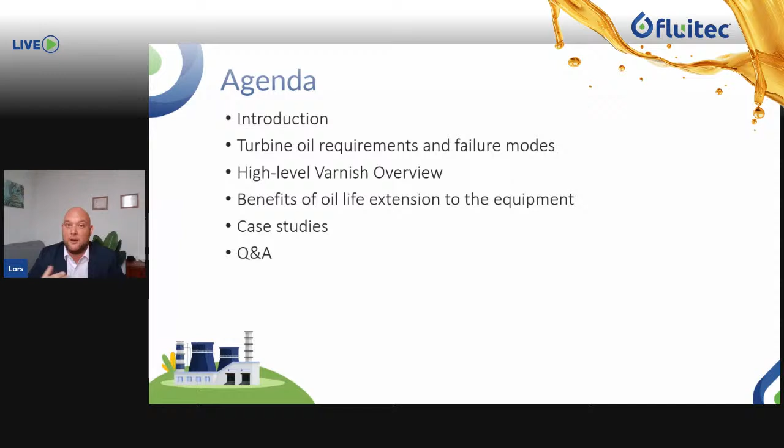So today I have the honor of speaking to the audience about advancing your machine to Fill4Life Systems. Important topic, as Sonia said, because we all operate advanced and expensive equipment. Of course, we want them to last as long as possible. So today I will talk to you about a few topics. The introduction is done very lovely by Sonia, so thanks for that. We'll talk a little bit about turbine oils. What are they supposed to do and how do they fail? It's a bit of a high level overview on things. And at the end, I want you to walk away with new ideas and new methods on how to make your equipment last as long as possible. And also, very important, how to make them run as efficiently as possible and how you can save some money, some time, but also save or at least help save the planet.

So, this is a strange combination. We say we are greening the lubricant industry. That may sound strange, but what's not very commonly known among the public is that lubricants play a vital role in reducing friction. And if you reduce friction, you increase the energy efficiency. So you reduce the energy usage, which means you reduce the CO2. So lubricants are actually a crucial part in sustainability. They are everywhere as well, they are unavoidable.

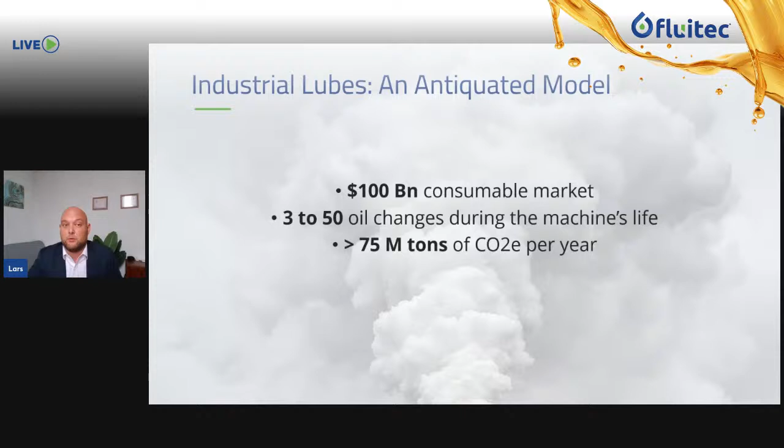So when we zoom in a little bit on industrial lubricants, we are faced with the fact that this is currently a very antiquated model. What this means is the industrial lubricant space is driven by consumables. It's all about pumping around this volume, getting the oil into equipment as many times as possible, changing the oil as many times as possible. That's the driving force behind this industry. It's one of the biggest markets in the world, and it's making a lot of money. But it's also producing a lot of CO2, and it's not a very efficient model at the moment.

So when we look at the life cycle assessment, that means the pollution of a lubricant throughout its life cycle, we actually can identify something very interesting. You see all these big refineries, big plants, oil exploration platforms, and so on. And we all know these are very polluting, right? But when we look at the total life cycle of a lubricant, this part, the cradle to gate, the production and logistics, shipping it around the world, is actually only 33% of the total pollution that a lubricant generates over its lifetime. The majority of the pollution is at the end of a lubricant's life. So why is that? That's because only 50% of lubricants that are used are recycled in today's world. The rest basically gets burnt up into the atmosphere.

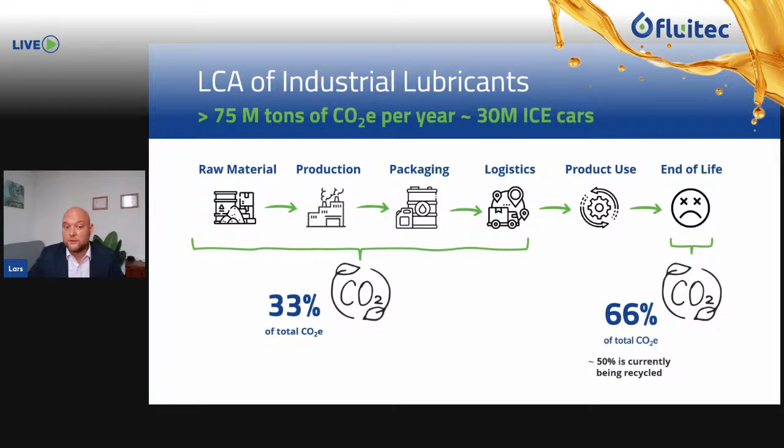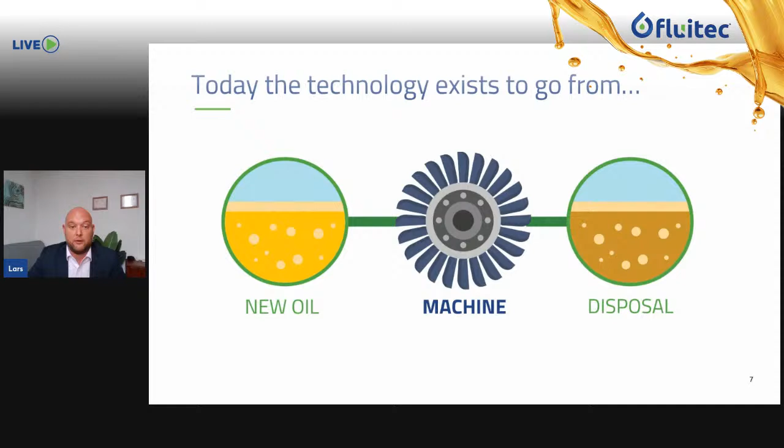With all the chemistry and molecules that are inside, you can imagine this generates a lot of pollution and a lot of CO2. And this is no longer necessary. At least we can reduce this quite a bit, because the technology exists today to go from the current model where we use up a lubricant and then dispose of it to a model that's much more efficient,

which we call the Fill4Life model. This consists of a cycle of activities that users and operators can do to get more out of their lubricants. That means extending the life of their lubes. That means lower operational cost, less risk, less maintenance, less time, higher profits, less pollution. The lubricants last longer, the end of life pollution goes down, and it's a win-win for everybody.

So there's a certain cycle of activities that the end user can do, which starts with being predictive instead of reactive. That's very important, meaning we want to do the right tests, we want to generate the right data on the fluids to make sure we have an accurate picture of their condition. We want to use everything at our disposal, both online and offline, relationships with OEMs, relationships with lubricant suppliers, to get all the information that we need to come up with a proper consultation for the customer.

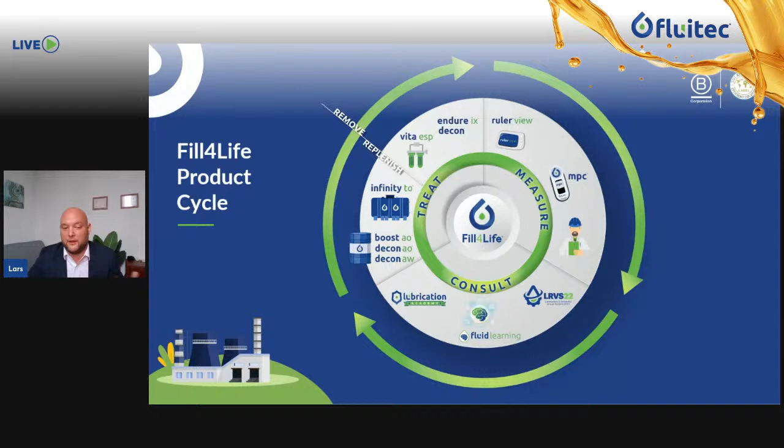And then at the end, we also want to treat, of course. And this is where it becomes interesting, and I'll go a little bit deeper into that later on in the presentation. But when we look at the product categories that we can provide, we can identify four main categories. And the one that I want to zoom in on a little bit more at the end of this presentation is the last one, which is life extension. This is, of course, important when we look at the end of life cycle. We can extend the life of the lubricant, which means we reduce the CO2 and reduce the environmental impact.

The product lines that we provide at the customer side range from different filtration methods to aftermarket additions to the oil, which contain additives or can enhance solubility of the oils, which I'll explain a little bit more. These product lines are always growing. A lot of R&D is being invested into them. They are innovative, new technologies to extend the life of lubricants, but also to optimize lubrication during its lifetime.

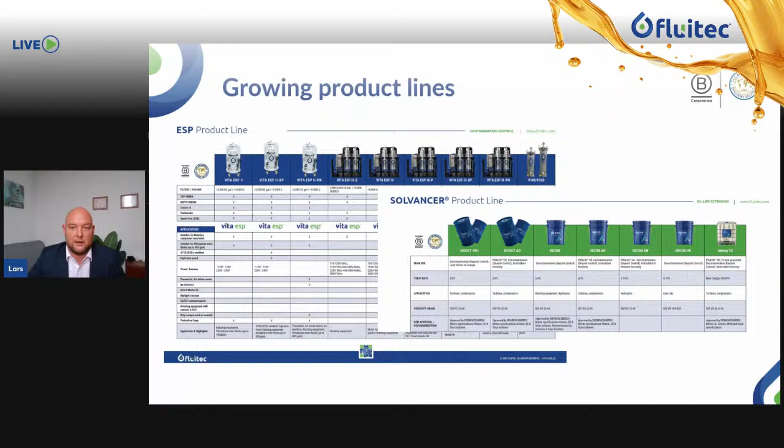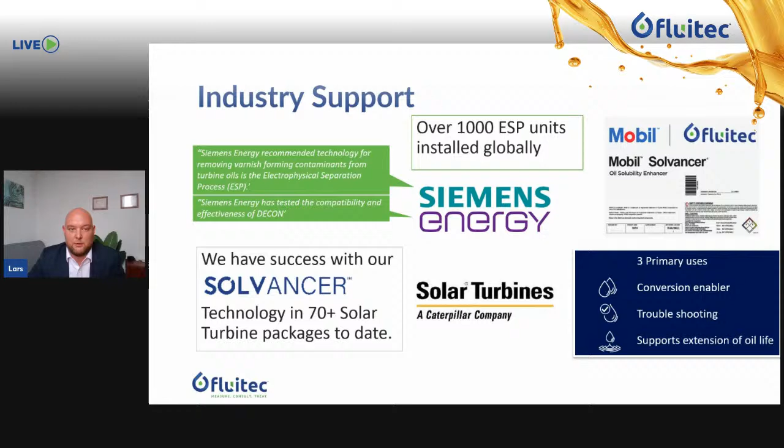These solutions are innovative, but they're not that new. They've actually been around for a while, and they are supported by the industry. That means the OEMs are supporting these technologies. They are recommending it to their customers. Even the oil suppliers support these technologies. And you would say, why would they support something that decreases their profit, that makes them sell less? Well, they are also very interested in reducing operational cost, and they're also very interested in showing that they are sustainable. So that's how the oil suppliers are also engaging with this technology.

So when we look at modern turbine oils, we need to zoom in a little bit on this, because we need to start with the basics. We need to understand what's going on with the fluid. So when we look at a modern turbine oil, it needs to do two main things. Everything in the world oxidizes. Even our bodies undergo oxidation. So an oil needs to resist oxidation. It has a slate of antioxidants inside to combat the environmental conditions or the operating conditions.

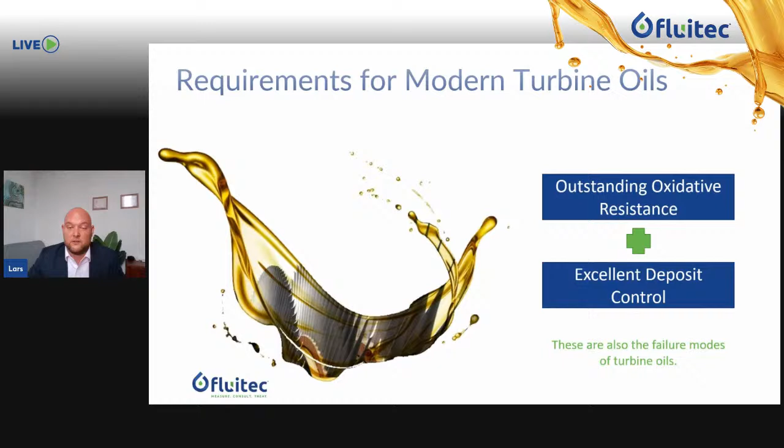We also want it to control deposits, because when it starts to decompose, it starts to form what we call degradation byproducts, which deposit onto the internals of your equipment. And of course, that will cause a lot of operational issues. So this is what we want the oil to do. But of course, there are ways in which an oil's performance gets degraded. This is what we call failure modes.

The primary failure modes of turbines can cause the operators a lot of headache. And this is what we want to prevent, because you can imagine if you have bearing failures, if you have sticking valves that are interfering with your startup time or your overall efficiency, this will greatly diminish your operational efficiency and will decrease your profit. It will make your plant less profitable. So this is what we want to prevent.

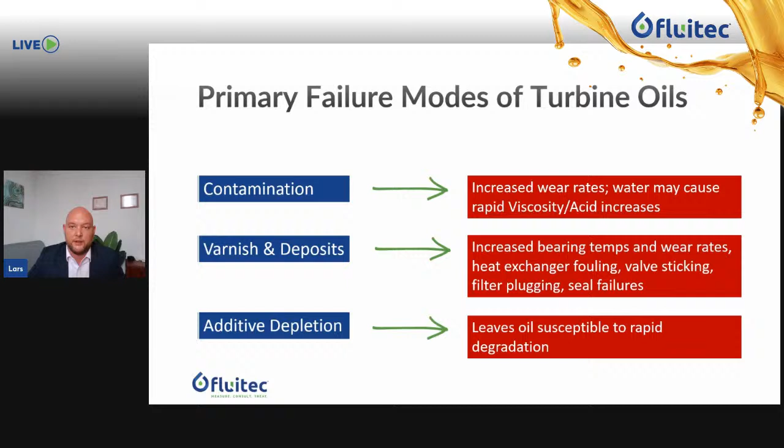And additive depletion, the last part here, is a very important aspect to consider because additives are sacrificial. They are consumed over time. And once they are consumed, the oil will degrade very rapidly. Luckily, there are various solutions to the operators that we can provide.

So the newest solution that we have here is re-additization of the oil, which is called Decon AO. AO here stands for antioxidants. We can also apply advanced filtration methods to keep the oil running clean and in a good state, because that's very important. That's what it's all about. We want the oil to run clean and pure with the correct amount of additives. As long as we do that, we can avoid these nasty failure modes here.

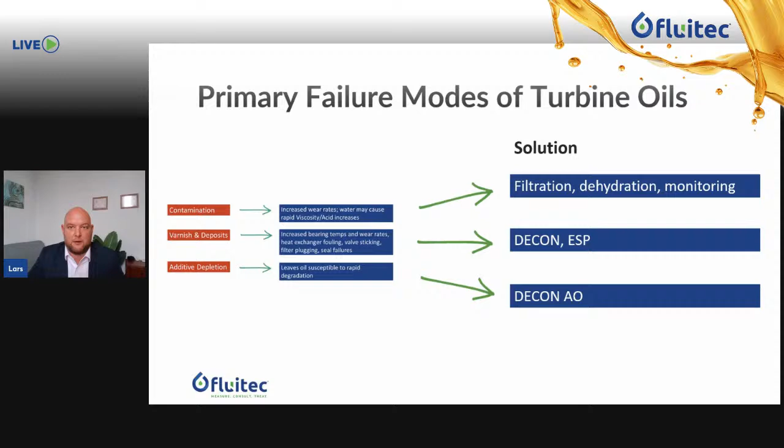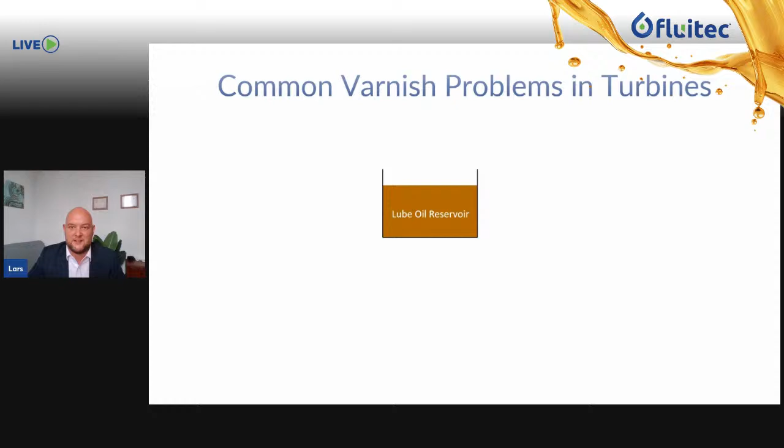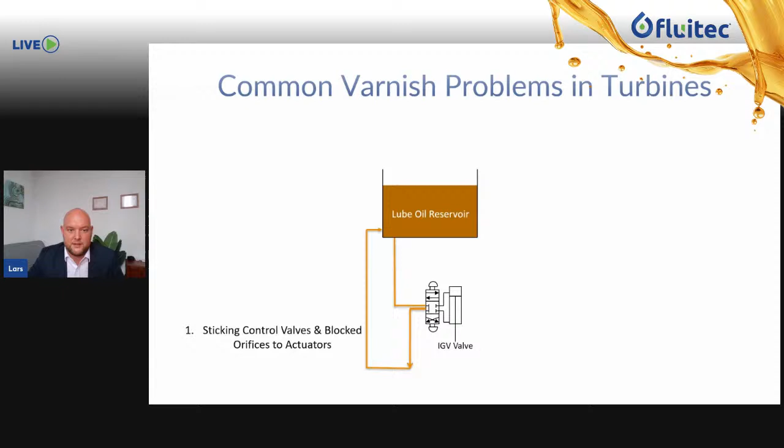So in the industrial world, we see varnish as the cholesterol of machines because it can interfere with a lot of things. So I'll show you some examples here. When you have a high cholesterol system or a highly varnished system, the first thing you'll notice, and the primary thing that we see, is valves that no longer work properly, which will increase your startup time, and it will decrease your efficiency. Also on your bearings, which are very high-speed rotational equipment, you will see instabilities. You will start to see vibrations. You will start to see temperature changes, temperature excursions, and so on.

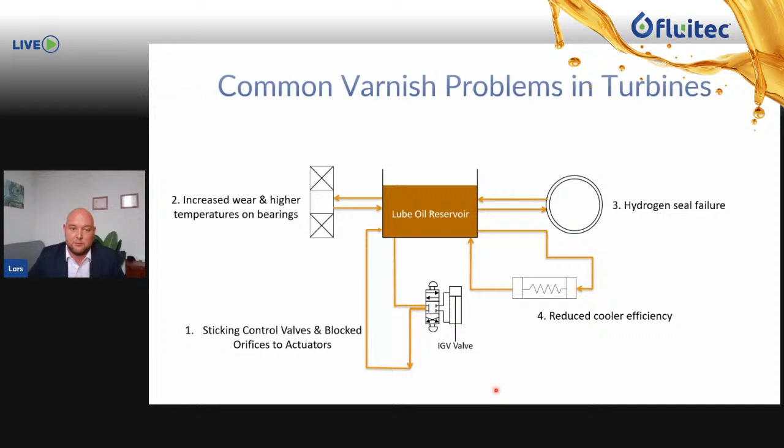The lubricant in many cases also acts as a seal. So when there are deposits inside, it can no longer perform its job. Then you might get gas ingression in your system. Gas and lubricants typically don't go well together, so this interferes with the operation of your system, leading to failure. When your heat exchangers are exposed to deposits, they reduce in efficiency, and that means they can no longer cool down or heat up your system as efficiently as they used to, further degrading the profitability and efficiency and environmental friendliness of your plant. So keeping your system clean and preventing this from happening is very important.

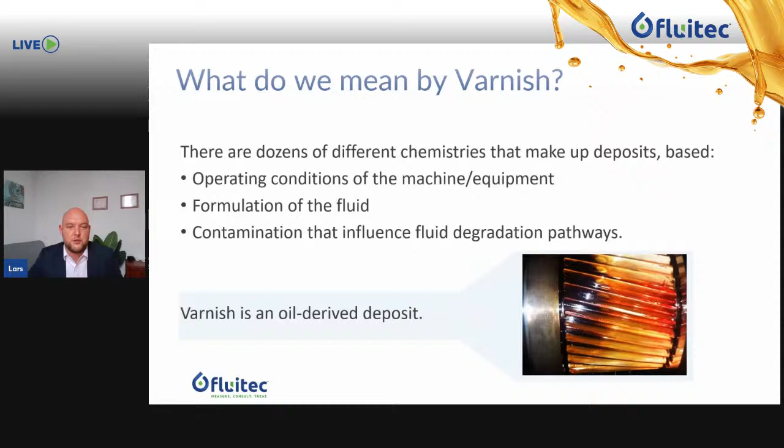But what is this phenomenon? So we define varnish a little more broadly to be an oil-derived deposit. That means it's not an external contaminant. It's coming from the oil itself. It's depleted additives. It's degraded base oil molecules, degraded hydrocarbons. So it's coming from inside the oil itself, accumulating and then depositing out of solution. So this makes it also a bit tricky to handle. Because it's coming from the oil itself, it has a certain aspect that makes it impossible to filter it out.

So even if you have a 1 micron depth media filtration system, the contaminants in this condition will pass right through your filter mechanisms and will cause a lot of issues in your system. So this is what we want to prevent. And for this, we have devised special methods to take out or to neutralize the contaminants when they are in this state, so during operation of your equipment. And that's crucial.

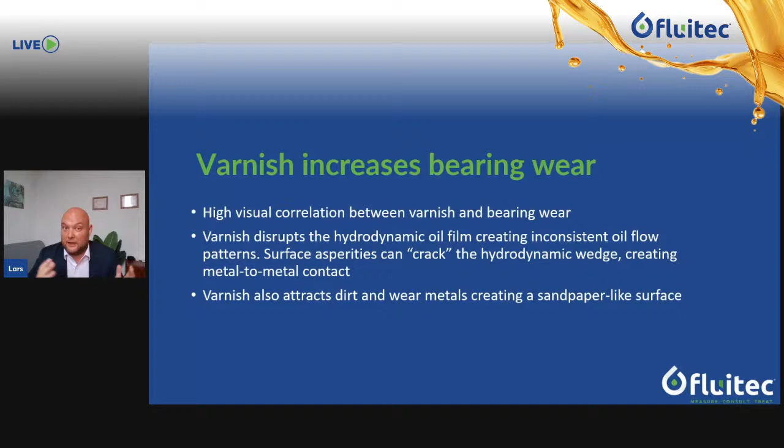What we also see as a result of varnish is increasing bearing wear rates, what I called earlier bearing instability. These are very high speed, very critical parts of the equipment that are operating with very low tolerances, and the lubricant performs a very crucial role in this part of any industrial equipment, basically. But I'll show you some examples which are mainly coming from turbines and the bigger bearing systems that we have in turbines. So here you can see some results when we have deposits and varnish in your system and how they increase the wear rate.

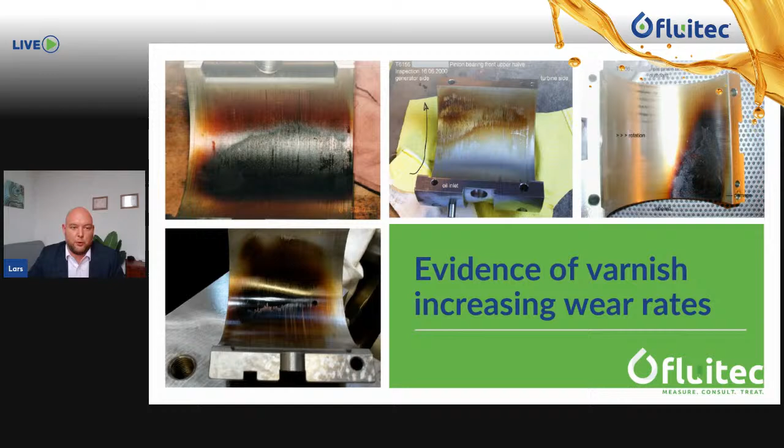So here you can see thermal damage and the varnish acting as an insulator and degrading the oil at this particular point, and this will of course lead to bearing failure. Here we see a very interesting picture where the oil wedge has been disrupted and the oil film is disrupted, which leads to metal contact, which leads to what's called micropitting, chipping away of the metal over time, which increases, of course, the wear metals in your oil, which further degrades the system.

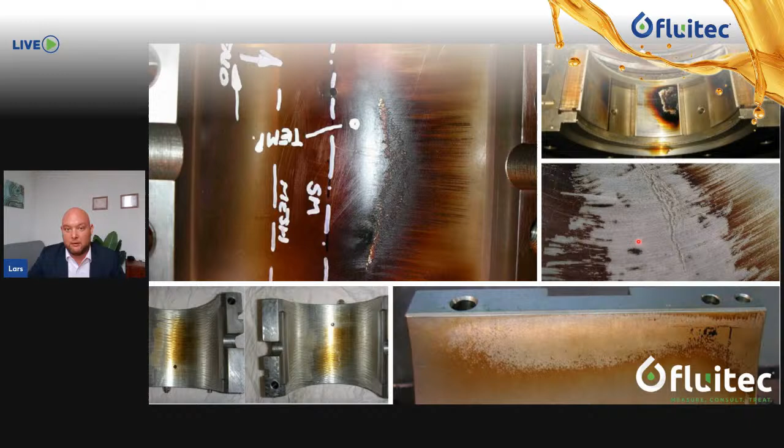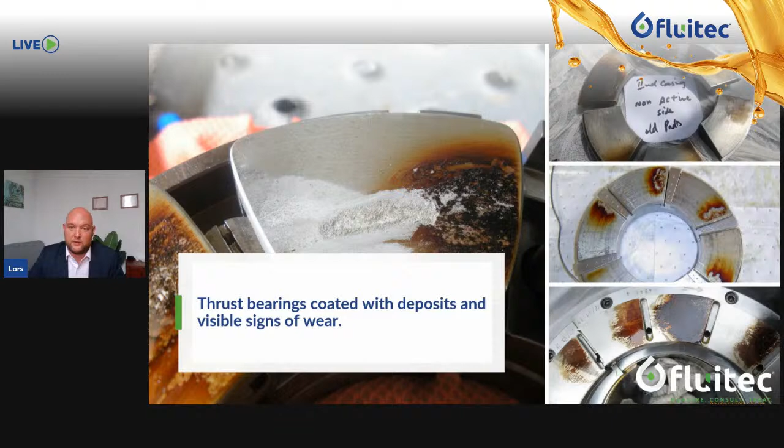But in this area here, you will have also bearing instability and bearing failure. Here we see some other examples of thermal damage as well. And on the thrust bearings, on the thrust pads, you will see where thermal damage has also interfered with the oil's ability to form a strong oil film. And in the hydrodynamic regime, there should not be any micropitting, but in this case, there has been micropitting, leading to, of course, the failure of the bearing in the end.

Now, when we zoom in on temperature, we have to consider that the deposit layer that you see here on these pictures will act as an insulator. One of the key aspects of an oil is to cool down your machine. It's designed to dissipate heat, to transport heat away from the critical areas of your equipment. Now, when there is a deposit layer, which is an insulator, it becomes more difficult for the oil to do this. So the oil's ability to cool down your system is diminished and there's an interference.

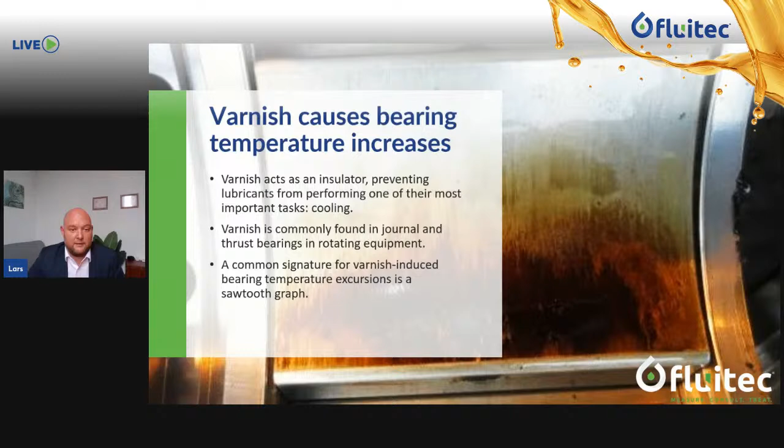Now, when we look at the temperature excursions, we see a very interesting pattern, which also gives us a very good way of determining what is the issue. Because the varnish and deposit layer will constantly change in thickness. It accumulates to a certain level, then there is pressure in the bearing system, which shaves off part of the deposits, which means they reduce again, and then the temperature goes down again. So this is an ongoing battle between the deposits, the pressure in the system and the oil itself, that will increase and decrease the temperature over a period of time.

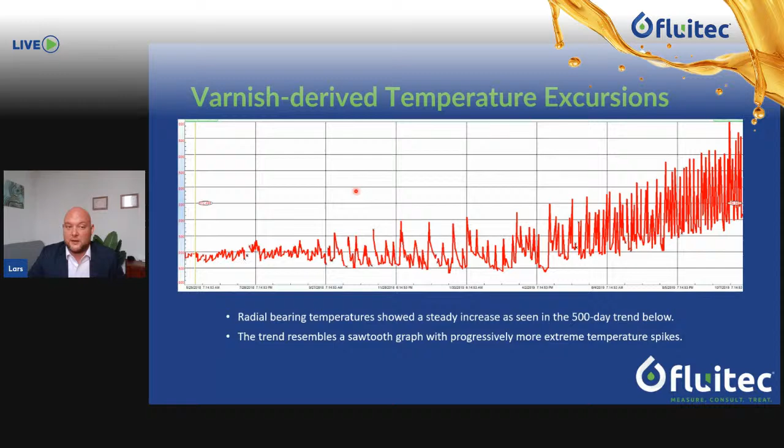Now, once the accumulation of deposit gets worse, you'll see this increase in amplitude, and over time, you'll get into an issue. So we can detect it early when we see this, what's called a sawtooth pattern of temperature increases. Sometimes it does not ring an alarm bell because the average temperature of the bearing system is not going up that much. But we need to monitor these temperature spikes, because at these spikes the oil degrades even more, because oil does not do so well at elevated temperatures. So it starts to decompose at exactly these spots in the bearing, and it starts to deposit more on your bearings. So when we see the sawtooth pattern, we know for 99% sure that you have a deposit or varnish issue.

So we have zoomed in a little bit on the symptoms, but now let's look at the culprit in a way: how do oils degrade. So we have devised a test that's called accelerated turbine oil aging. I won't go too much into the details, but it's a test designed to simulate in a number of weeks the lifetime of the oil. Here you can see 3, 6, 9, and 12 weeks, where we take a sample out of the test to do some oil analysis on. This stands for 3 years, 6 years, 9 years, and 12 years. So in this way, we can very accurately predict in 12 weeks of testing how a turbine oil will behave throughout a lifetime of 12 years. So it's a very valuable test, and it's mainly focusing on oxidation and deposits, because remember, these are the primary failure modes of turbine oils.

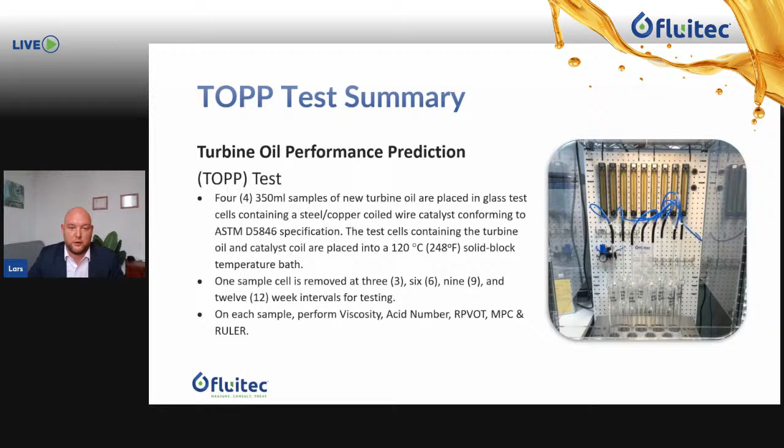Also, availability of certain oils is very different in different regions. Different markets have different oils available. Pricing and so on all play a factor. So that's why there's a wide variety of oils available to end users. But the performances are very different.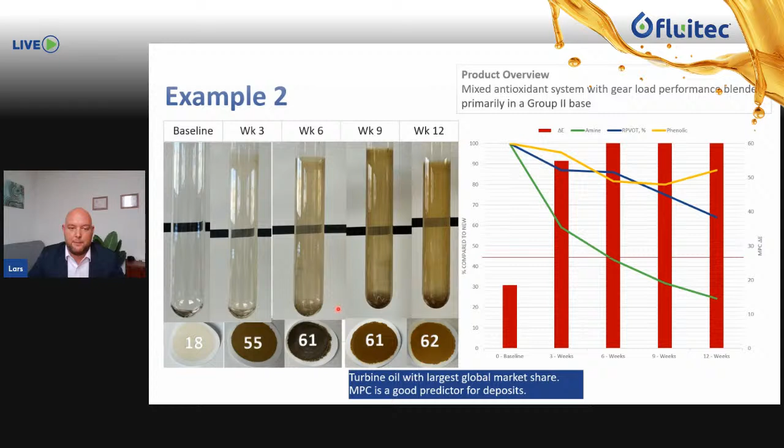pattern. So that means it is not likely to cause severe issues immediately, but when the end user would do correct condition monitoring and monitor all these parameters, they will have some time to act on this oil, and they can apply some of our solutions, for example, to prevent this from happening and to make sure that this oil lasts much longer than it does in this test.

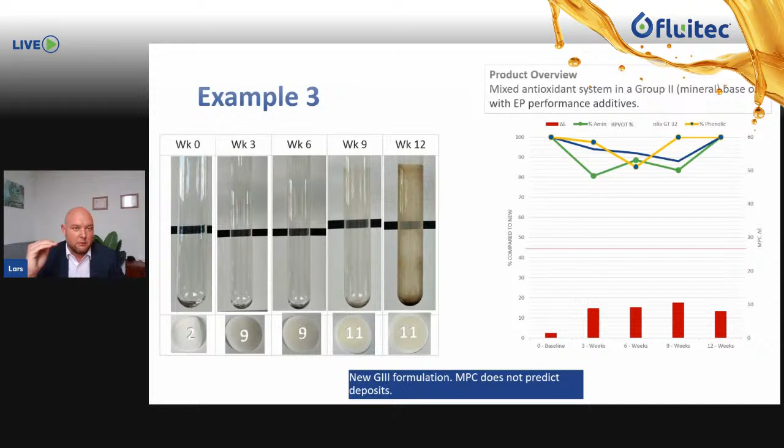So the conclusion here is a lot of different oils on the market, a lot of different experiences by end users, a lot of different performances. But how can we equalize the playing field? Can we provide a solution to the end user that will make life easier for them? So fortunately we can. We have developed a product that's called Decon, which can be used as a problem solver, but generally speaking, it's a very good proactive way to manage this problem.

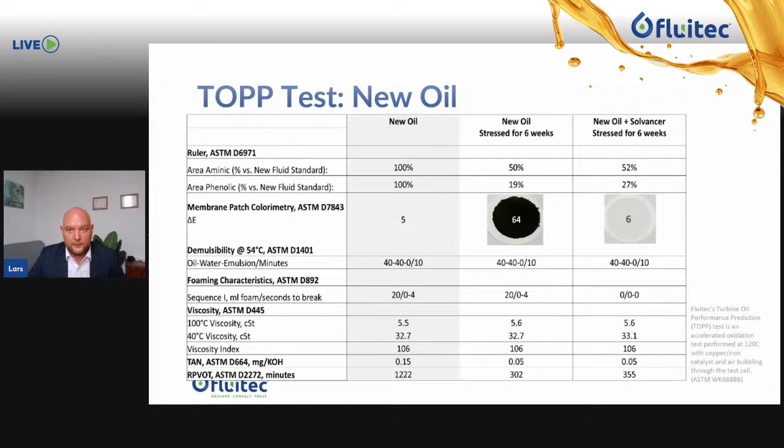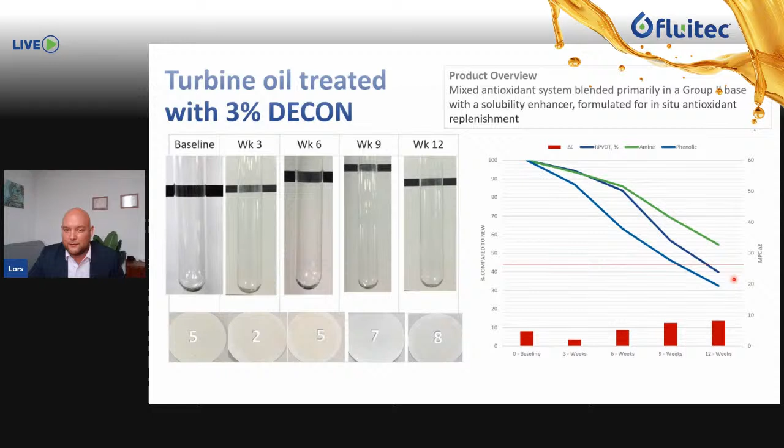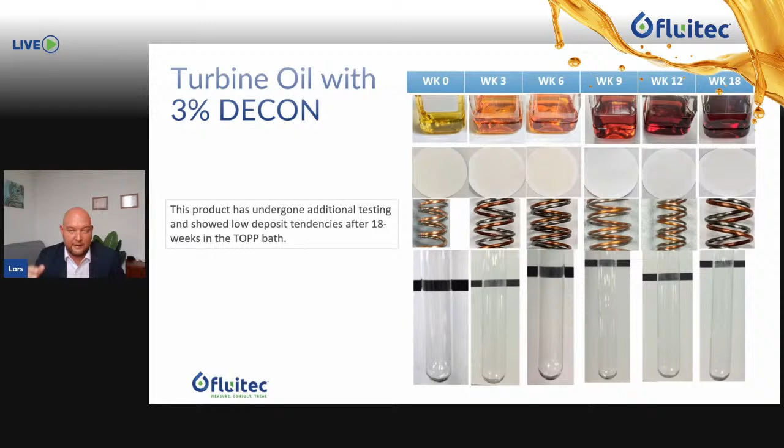But let's zoom in a little bit more on this oil because the additives at the end of this test have been mostly depleted. But we decided to continue the test and to let it run for 18 weeks. So that means that even after the additives are depleted, in this case a simulated time of 18 years, the Decon product inside the oil still prevents deposits from forming. So this gives end users an additional protection, an additional peace of mind against the formation of deposits. So even when your oil is completely shot, the additives are gone, still our product can protect against deposits and varnish.

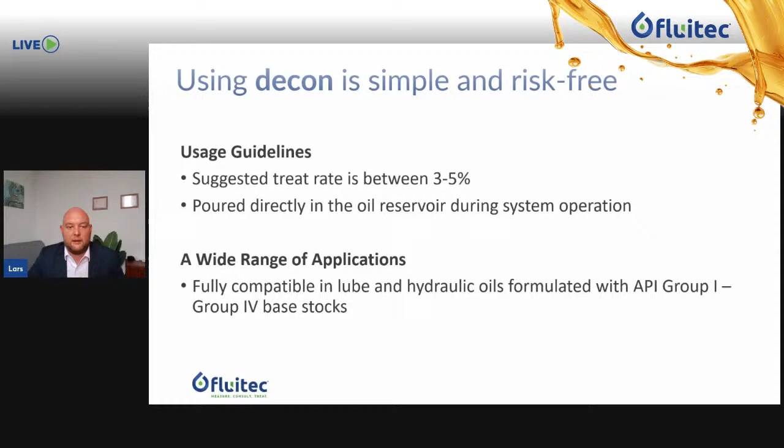It's simple and risk-free to use, treat rates of 3 to 5%, and it's fully compatible, which is very important, with not all, but group 1 to 4 industrial oils that are currently in the market. So that's the bulk of it. No risk in compatibility there. We can show this versus some competition.

When we compare our product versus competitors that are claiming to remove varnish from the oil as well, we can see a distinct difference because there is no other product that is suitable for long-term use in oil that gives the same results as Decon.

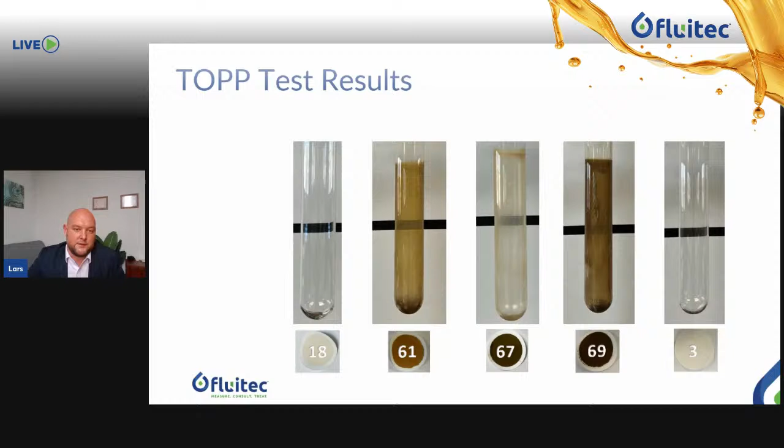When we compare these results, we can clearly see that the products that are used in the market as competition cannot be used in the oil for a longer period of time. They cannot be used during the operation of the machine. They can be used as a pre-cleaner, but because they are usually detergent-based, they do not interact well with the oil. Detergents and lubricants do not go well together for longer periods of time.

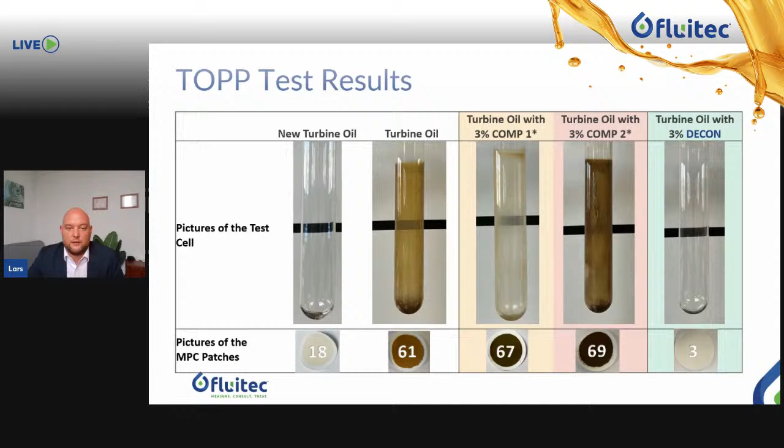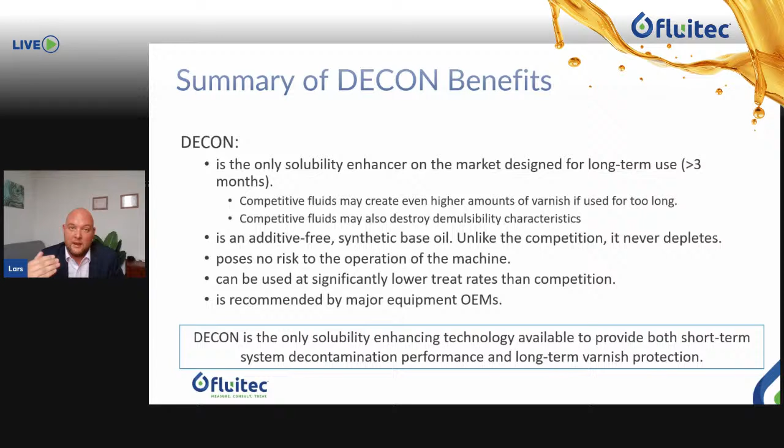So Decon is the only product in the market today that gives you a carefree life for longer periods of time. It's completely suitable to extend the life of your oil without any risks of compatibility. So here we can see the benefits. To summarize it, it's at the moment the only solubility enhancer product in the market that is tailored for long-term use. It's an oil-soluble cleaner that you can use to clean your system of deposits and varnish before an oil change, but it's a unique product because it's the only product in the market that can be used throughout the oil's lifetime without any concern.

And I would like to highlight that on this part. It's the only solubility enhancing technology that can provide you a short-term solution, but also long-term protection against varnish and deposits. We love teamwork at Fluitec. I hope you do too.

So we also have our specialized filtration systems, which I mentioned in the beginning. And these are able to take out contaminants, oil-soluble contaminants, from the oil during operation conditions. Remember the solubility aspect that I showed you earlier, where the contaminants get dissolved into the oil in operating conditions? Well, we use an ion exchange-based technology, which interacts with the molecules of the varnish and deposits, the degradation molecules, as we call it. It attracts them into the resin beads and keeps them there and neutralizes these molecules.

So this is a specialized technology. It's not a regular depth media filter. It's something very different. And we have devised different technologies, different sizes with their own kidney loop system. And there's a new kid on the block here, which is an inline system, which uses the same resin technology but does not need its own power source. It can be engineered as an inline filter in turbine oil systems.

And when we combine this technology with the aforementioned Decon, we have the perfect solution, because we prevent the buildup of varnish through Decon. We solubilize the contaminants, but we also take them out of your system through this ESP technology. And especially when we combine this with antioxidants and antioxidant boosting, we can extend the life of the antioxidants, because we will remove all the bad stuff from your oil which will attack your antioxidant system. So by keeping the oil clean, we extend its life even further.

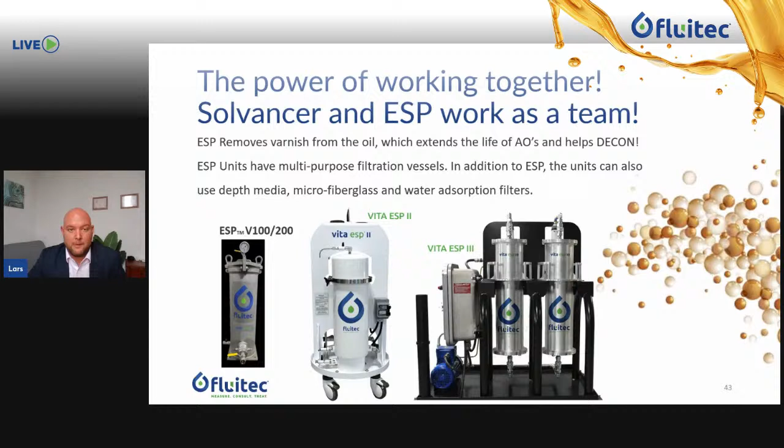Now we talk a little bit about antioxidants. That brings me to the next topic, which is one of the most important parts about advancing your systems to a Fill4Life system. We need to look at your additives. The additive system of the oil is what's giving the oil its performance. It's in many ways the performance enhancer of your oil.

Now let's look a little bit at the general turbine oil formulation, and this actually applies to a lot of industrial oils as well. So what is interesting here is that it's 91% minimum, but in reality this is not always used. So in many cases, 99% of the oil that you're using is actually refined oil, base oil. It's not a technologically advanced product. It's coming straight from the refinery.

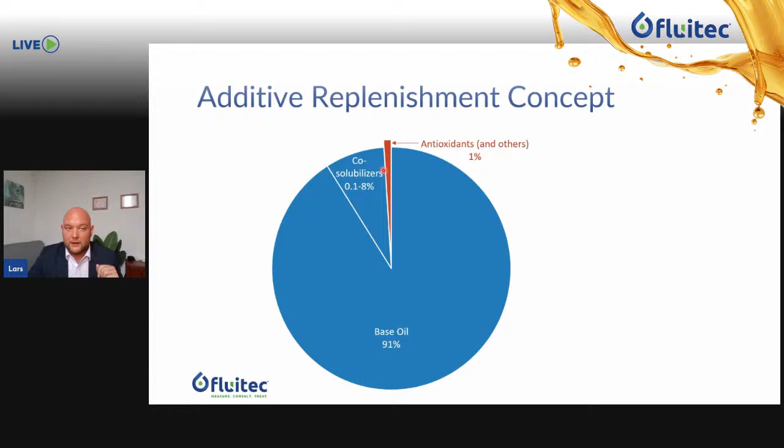And what the oil producer does is add 1%, typically in turbine oils, of antioxidants, which are typical aminic and phenolic antioxidant packages designed to resist oxidation. And this is what's giving the oil its performance. However, we also say when the performance of the oil goes down to 25% of new, you have to change the oil. So if this 1% is giving it its performance, then when this goes to 0.25%, we have to change the oil.

What this means is you're throwing away 99% of base oil which, because it has not been depleted yet, is not attacked yet. It means it's in a good condition. In many cases, it's in a very good condition. So then we throw out 99% of all this good stuff that we could still use.

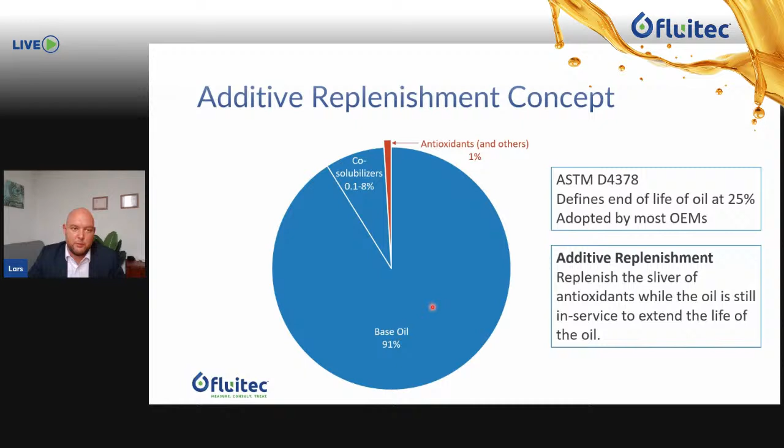So instead of doing that, when the base oil is still in a good condition, and we can determine that by doing oil analysis, let's just replenish the part of the oil that gives the oil the performance. Why not? This sounds totally logical. So instead of throwing out all this base oil and putting in new, we're just going to focus on this 1% and replenish that.

In order to achieve this safely, we would always do upfront testing. That means we want to guarantee at the end user level that the oil will perform after we treat it and that there's no compatibility risk. And here you can see already some nice results when we do the pre-test. You can see that the particle count after dosing it with Decon goes down because Decon is a solubility enhancer, so it dissolves all these particles back into the oil.

And here we can see oxidation performance, RPVOT, from 30, which is almost nothing, very bad condition of the oil, up to 960, which is close to the new oil. We see the same results when we measure for the actual antioxidant levels through the RULER test. We see that it increases to above 100% aminic, which is giving the oil most performance. And the MPC, the varnish potential, is going down to 14.5. So we're killing a lot of birds here with one stone. We go from an oil that was supposed to be discarded to an oil that's basically at the same performance level as a new oil.

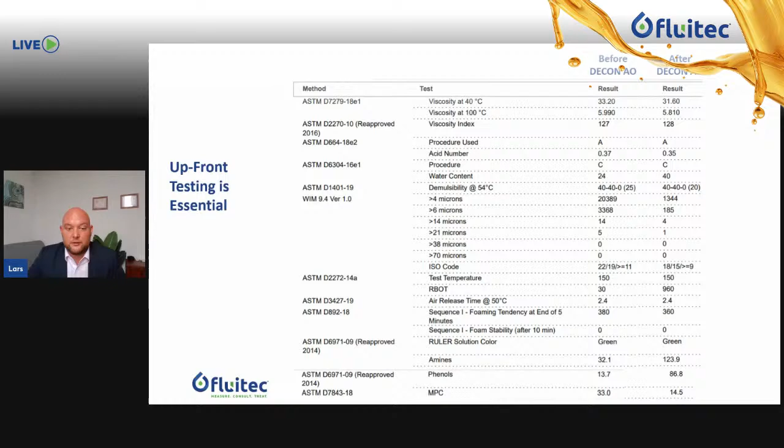So we're not just doing testing, we can also prove this by various case studies. So I'm going to show you today the oldest case study because that probably holds the most value when we determine whether this is something we can do. The oldest case study for us is in the US with Mesquite Power. There's also a YouTube video available where the supervisor will explain a little bit more about what they have done and how they have managed to achieve very nice results with our products.

So in summary, what this company has achieved is $3.5 million US dollar savings and also 3,000 tons of CO2 saved from being expelled into the environment. So excellent results. But how did they do that? They did that by condition monitoring, keeping track of their antioxidant level, because that's where it always starts. We need to keep track, we need to measure. You can't fix what you don't measure.

So when the antioxidant levels deplete, in this case we are at 60%, we decided to add Decon AO to this oil. So our products go in, then we see the additive level going to close to 190%. So almost double the amount of performance compared to new oil. Then this oil shows a very nice gradual degradation pattern, no issues, no varnish, no deposits at all. In 2020, we went below 100%, and the user told us, why not do it again? So in 2023, we decided to add another dosage of Decon AO, and we again brought the additive level back to the level we did 10 years ago. So we have some very nice data points here in 2012 and 2023.

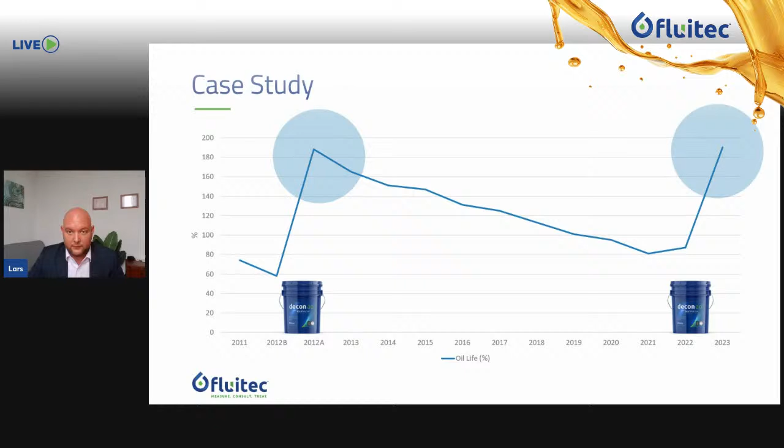And what we can conclude is that we have a turbine oil here that was 8 years old when we started treating it. It was initially extended by 10 years. So that means it's 18 years old. However, it's still in excellent condition. So remember, all this base oil that's in the system is not degraded. It's in an excellent condition. So we can easily extend this for another 10 years, and then we go to 28 years. So this means they save another $3.5 million. At this point in time, they have saved $3.5 million over the last 10 years, but they're going to save another $3.5 million over the coming 10 years.

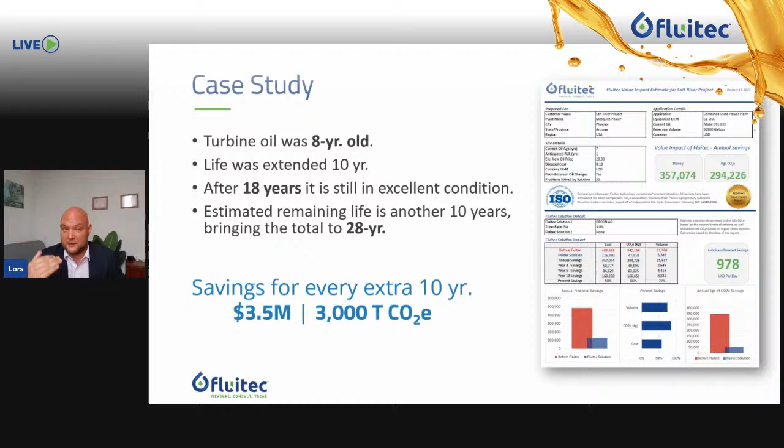We calculate this together with the customer, as you can see here. We can calculate CO2 savings. We can calculate how much money has been saved, all validated by the customer. And in the future, this is important. This can be used for carbon accounting as well. This allows our customers to show how much CO2 they are saving and what efforts they do to reduce CO2, which can have additional financial benefits because many countries have moved to taxing CO2 emissions. So if you can reduce your CO2 emission, you have further profits to enjoy.

So to summarize this case study, this is an example of just 1 out of 6 units. So we have similar results with 6 units. And as mentioned, what we will end up with here is a turbine oil that will last at least, maybe even more, 30 years in the system. Now, remember, this is a large frame gas turbine. This is a massive GE power generation turbine, with a lot of heat, a lot of internal combustion taking place. It's a very stringent environment. It's unheard of to have 30 years of life in such an environment. We have oils that last 30 years on hydro turbines, for example, because they have much lower temperatures.

But in a large frame gas turbine, it's completely unheard of to have a turbine oil that lasts 30 years. So without doing bleed and feed or top up, by the way, this oil gets only treated with Decon AO throughout its life cycle. So what we can conclude then is that additive replenishment is nowadays a proven methodology to extend the life of the turbine oil, and that means we are well on our way to a Fill4Life turbine oil.

And to prove this concept, we can say: no longer throw out your oil. Don't waste this much money. Don't put so much stress on the environment. Let's extend your oil life. Keep using it. Reduce your flushing. Reduce your maintenance. Reduce your overall cost of operation, and save a lot of money in the process as well.

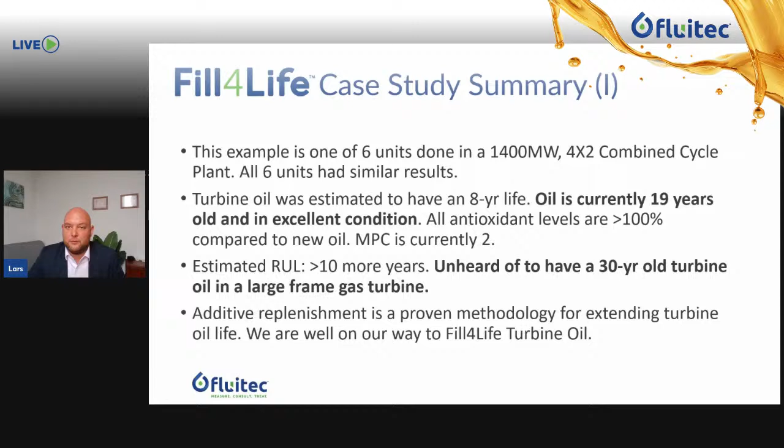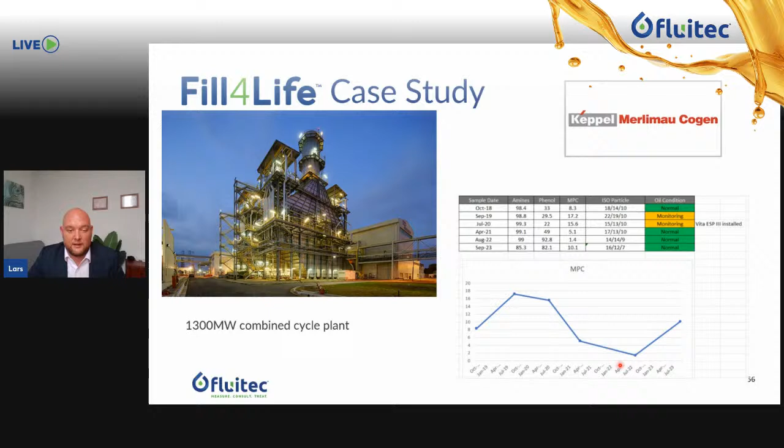Also in Singapore, Keppel Merlimau. Keppel is a big group supporting various OEMs, GE, MHI, that is Mitsubishi Heavy Industries, and so on. They are using our products in various equipment, and we see a continuous reduction of MPC and a normal oil condition. So going from oils that they had to change to oils that they can continue to use. And again, decent savings over a period of time.

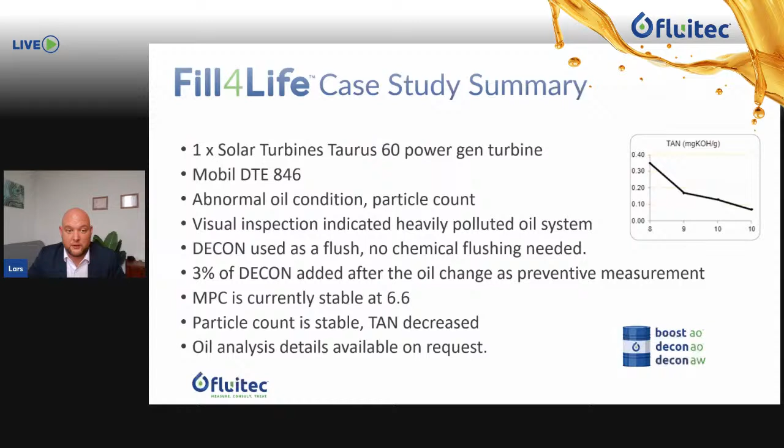Also in pharmaceuticals, very advanced manufacturing, we are in there now as well. Similar, very good results, preventing an oil change. Keeping the acidity low is also a result that we often see, which is very important to extend the life of your oil. Last but not least, the largest power plant in Singapore is also continuously using our products. So very satisfied, also on different OEMs, and we'll continue to extend the life of the oil. So overall, we've saved a lot of money just in Singapore alone, and a lot of oil from being prematurely discarded into the environment.

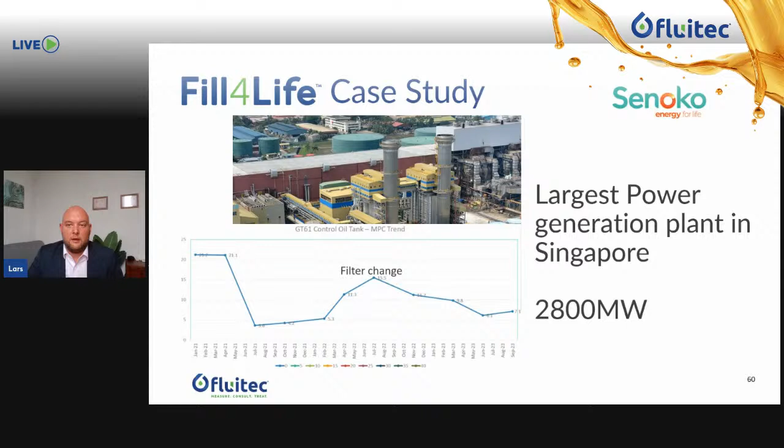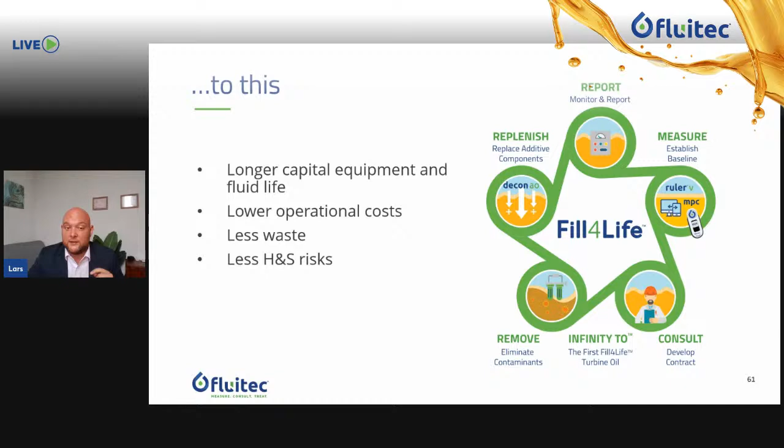So I'm going to finish the presentation now, and I'm going to answer some questions. But before I leave, I want to bring back attention to this part. The general model of Fill4Life is now used mostly on turbine oils and bigger compressor oils, for example, because these are large oil sumps and the operator has a lot of benefits by doing this continuous cycle of activities to help them save oil and to be more energy efficient. But this process is applicable to all, or at least most, industrial oils and applications.

So whether you're operating a turbine oil, a gear oil, a smaller system, or a bigger system, have a look at this concept because it can save you a lot of money, it can save you a lot of waste, and it can help save the environment. So it's a win-win for everybody. So please have a look at Fill4Life to advance your equipment to Fill4Life systems.

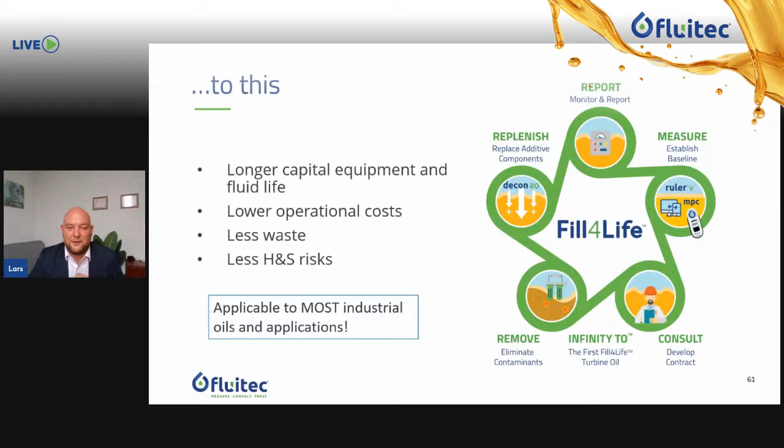Thank you so much, Lars. That was a great presentation. I know we have Irma Lisa saying that was a really good session. Thank you so much for sharing and for letting us know so much information about the Fill4Life system.

I think one of my biggest takeaways from this is that we have all of this base oil in our turbine systems, and a lot of the time it goes to waste, and that is clearly not good for the environment. If there are ways that we can make it a little bit easier on the environment... I love the fact that there are certain things we can do to get those carbon credits, because those are going to take effect very, very soon. So I like that you shared that with us.

So we don't have any questions right now, but I'm just going to give you my thoughts on what we have so far in terms of being able to bring that value to the customers, to be able to tell them, okay, you don't have to throw away this amount of oil, because it costs money to dispose, it costs money to replace, it costs money to do all of these other things, when you can just make it a little bit better.